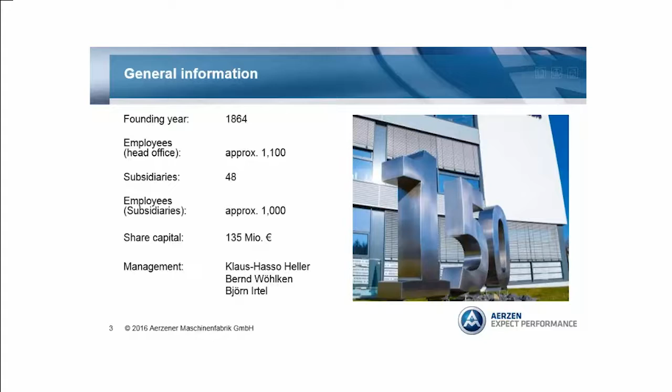Hello, my name is Artur Dybała, Aerzen Poland, subsidiary of Aerzen Maschinenfabrik. Aerzen Maschinenfabrik is a company coming from Germany, Lower Saxony, near Hanover, and manufacturer of blowers, compressors, and gas meters. Founding year 1864, so the company is over 150 years old. Share capital 135 millions, and management Klaus-Hasso Heller; it is a family-owned company.

In 2011, Aerzen bought a subsidiary manufacturer in Korea and created Aerzen Turbo. So we are also manufacturer of turbo with air bearing products, turbo blower, especially designed for low pressure, mainly water, wastewater, food industry, let's say clean industry. Subsidiaries all over the world, especially Europe, traditional market, but also Asia, America.

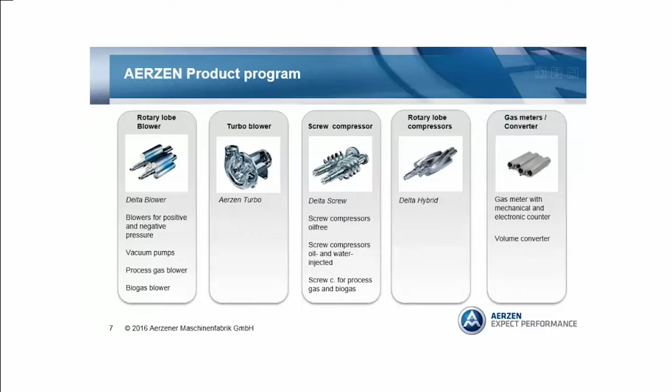This is our production portfolio again. Delta blower, positive, negative pressure, and Aerzen Turbo. Delta screws can be also screw compressors. These are screw compressors, mainly oil-free. Delta hybrid is a screw blower. There are also gas meters.

Thank you very much for keeping the time. Are there general questions about Aerzen or the products? So, no. So then we come to the next presentation. We have invited a company which provides diffuser systems mainly, Aquaconsult. They often work together with Aerzen, so please.

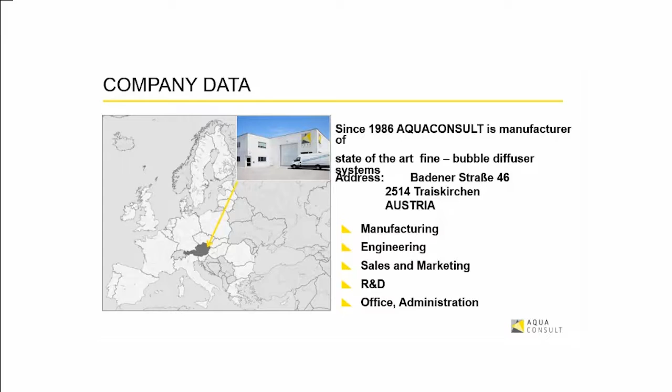So my name is Gerald Kleine. It's my pleasure to introduce you Aquaconsult. That's our company, located in Austria, a bit south of Vienna. And we have manufacturing, engineering, sales, R&D and administration all under one roof, like 20 kilometers south. But maybe we are more famous for the product, which is Aerostrip. That's our diffusers. And we have a 30 years history meanwhile.

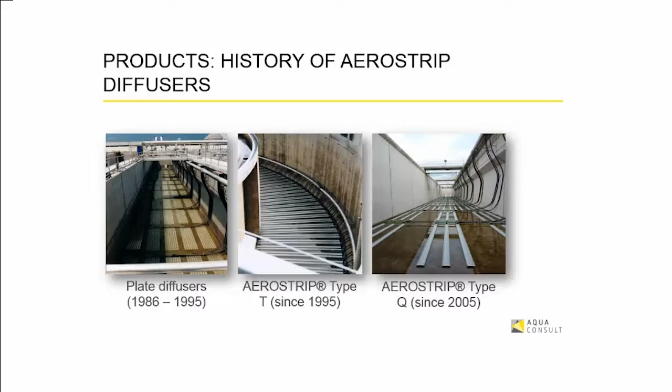We started with the big panel diffusers in the middle of the 80s, the 1 meter wide diffuser and then up to 4 meter long. And in the middle of the 90s, we started with the Aerostrip, a strip-shaped diffuser, 18 centimeter wide or 15 centimeter wide and up to 4 meters long. In the middle of the 2000s, another type with a plastic body came into our portfolio.

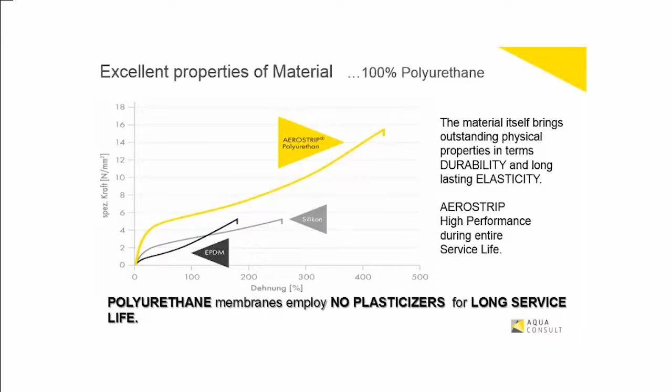So today we have two different types of diffusers, and they are known for longevity and efficiency. So why are they efficient and have a long service life? One thing is material. We use 100% polyurethane. This has no plasticizers, no fillers. So this has a very long service life. And important, it remains flexible and elastic for a very long time. So that's one of the tricks, let's say. And the other thing is innovative perforation technology.

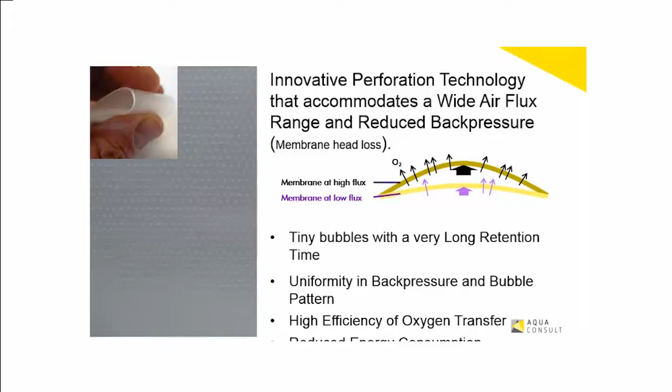So we can handle a very wide airflux range, a very wide operation range of diffusers. And during the last years, we also worked on reducing the head loss of the diffuser. As Dr. Wagner explained, it's all about physics. We have to keep the bubble as long as possible in the water, so that as much oxygen as possible is transferred. And how we do that is we make small bubbles, and we make a very uniform distribution. And at the end, we have a very high oxygen transfer.

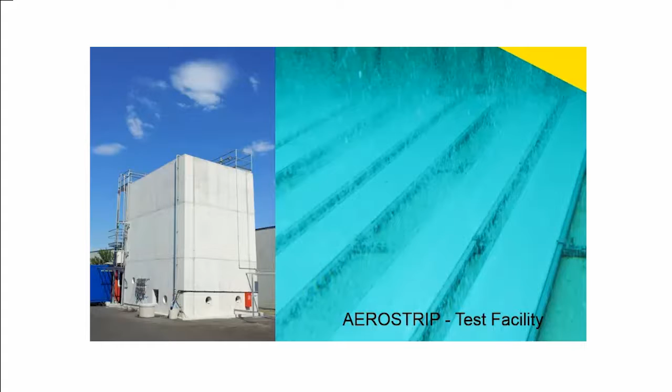We also have our own test facility at our yard. It's a 200 cubic meter test facility, and we are a bit, let's say, obsessed by quality. So each diffuser, before it leaves the factory, is tested for pressure drop. So for each diffuser, wherever in the world, we know what pressure drop this diffuser had when it left the company, and it is also checked in the water basin. So that's, I think, pretty outstanding.

And so I think we brought quality to high standards with Aerostrip, and I say thank you.

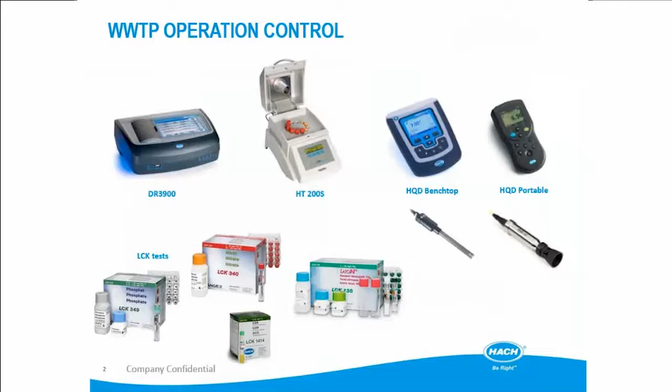So I think that some of you know our laboratory solutions, but for sure all of you know our process sensors. And we are one of the largest worldwide manufacturers of process measurements. And of course, if you have them installed on the plant, it will be nice to use them not only for monitoring, but also for process control.

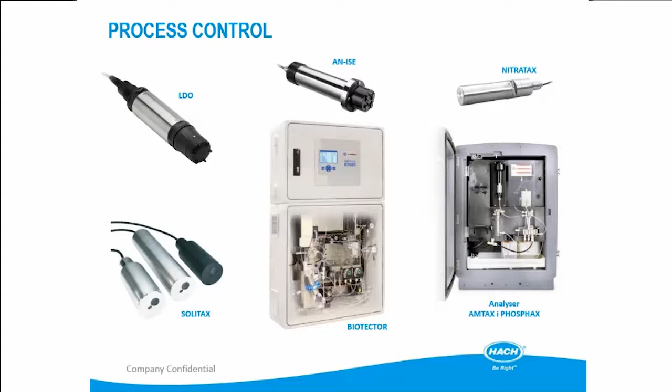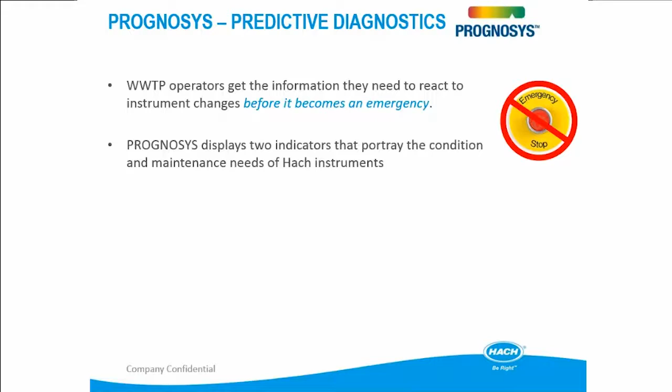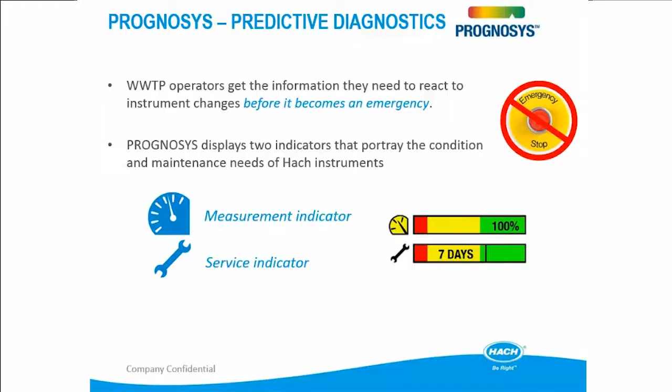We as Hach thought that maybe if you are relying on our instruments, it would be nice to give you a tool to be able to trust our instruments and work with them in a very easy and predictive way. That's why we developed a Prognosys system, which shows you very simple information. So it tells you how accurate the measurement is, but most important for the plant operators is the information about the maintenance tasks that you have to do with your instrument to keep it working all the time at high quality.

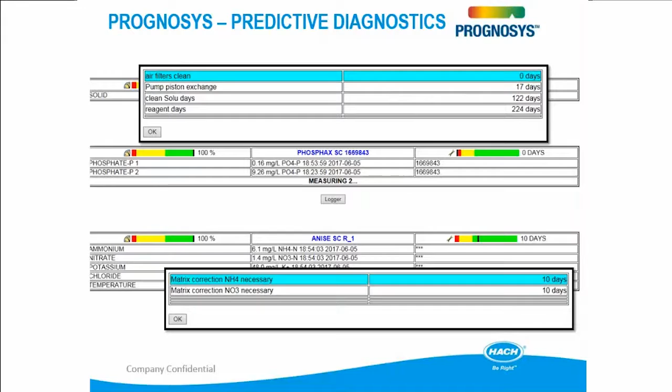It is visible on our controllers, and also if you connect to the controller using the internet connection, just by one click you can have a very detailed insight into the future maintenance actions that you have to take with the instruments, so that it's running continuously without any unnecessary unplanned stops and problems. When we have this, we can move on to process optimization, because this requires huge trust in the measurement, and we have to make sure that they are all reliable.

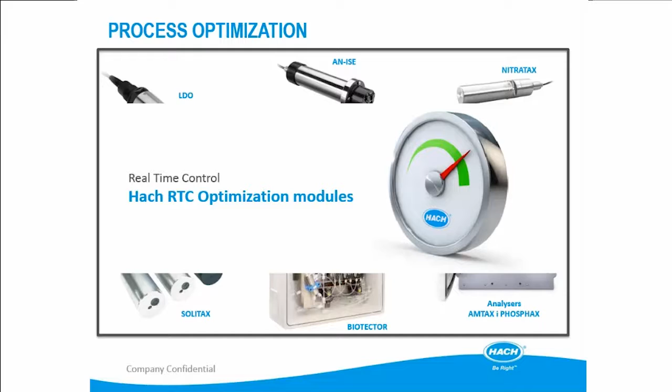And here Hach also developed an RTC system, RTC from real-time control, a modular, standardized optimization system which can be used to optimize several different processes at wastewater treatment plants. So the biggest savings, of course, you can achieve using aeration optimization, but also we can optimize coagulant consumption, polymer consumption, sludge production, and several other processes.

What is important? You don't have to know what you want to get from us. We, as our Hach team, come and analyze your plant, and we tell you which solution would be the best for you and which will give you the best effect. We are not the only supplier of such systems, but certainly the one with the biggest experience in the world. At the moment in Europe, we have over 1,500 RTC modules installed, so it is about 700 treatment plants. At some plants there is only one module, at some plants we have bigger systems.

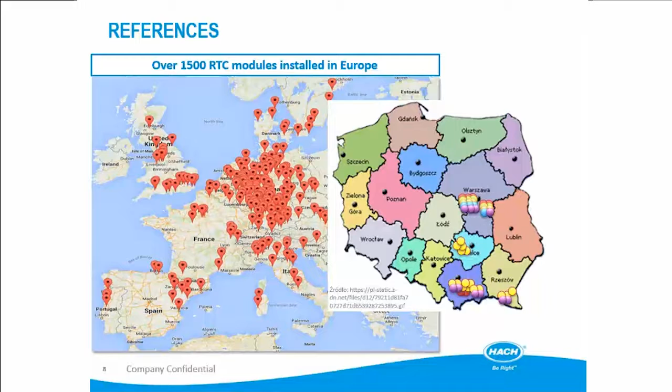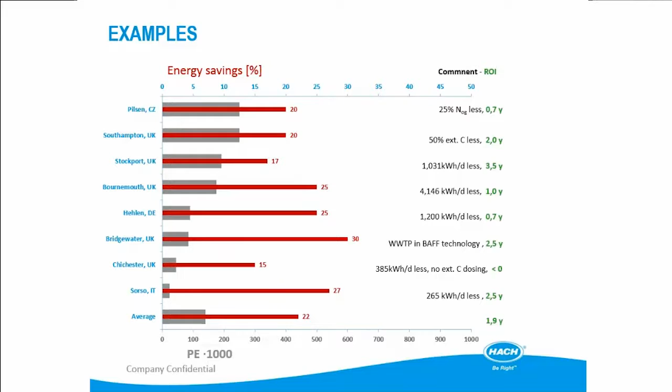And you are probably wondering why I am holding the phone in my hand. Not only to know that I'm running out of time, but also to show you that we have a new solution, a new concept, which is mobile sensor management. And such a smartphone can give you a lot of information about your plant, about your instruments, about maintenance instructions, and also a connection to the laboratory.

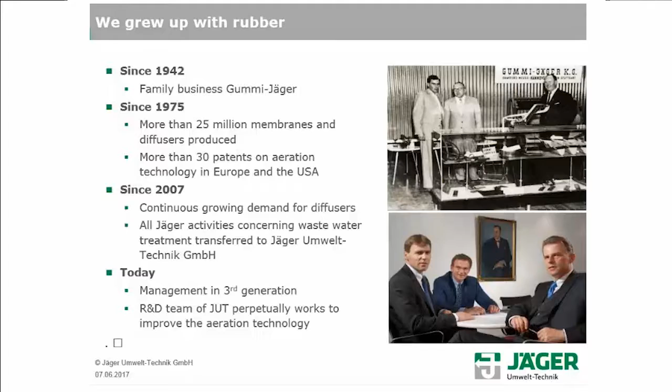In the year 2007, the company grew and was divided into 4 different divisions. One of the divisions is Jäger Umwelttechnik. Today, the company is managed by the 3rd generation. This is our product range. As you can see, we have more or less all types of diffusers, tube diffusers, disc diffusers, also strip diffusers, and coarse bubble diffusers.

A second part of our business is the IFAS. This is the integrated fixed film activated sludge system to improve plants and increase capacity of wastewater treatment plants up to 100%.

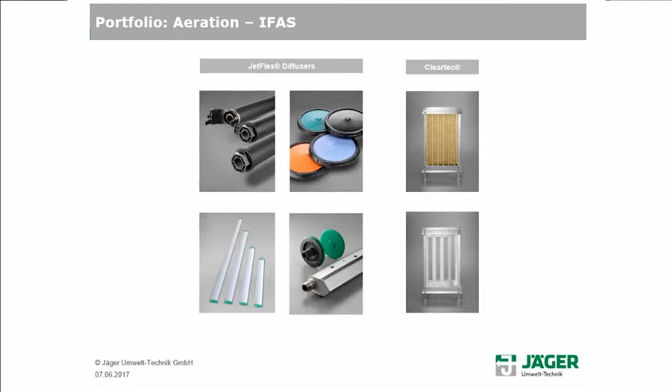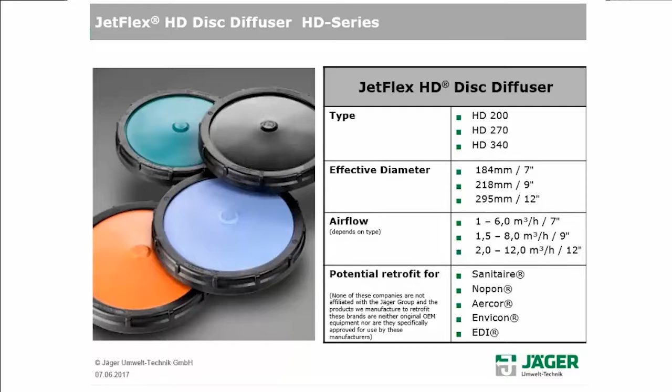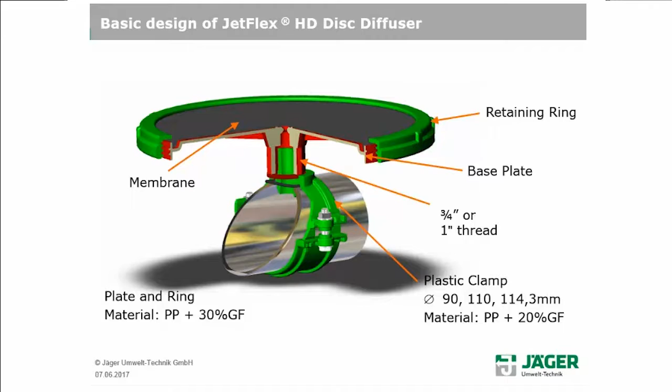Here you can see our disc diffusers. We have 3 sizes, the 7-inch, 9-inch, and 12-inch diffusers with more or less all available membrane materials, EPDM, low plasticizer EPDM, silicone, and also Viton for special applications. Next is the system. We can supply the complete aeration system, including the piping, installation and accessories. This is a typical installation of disc diffusers.

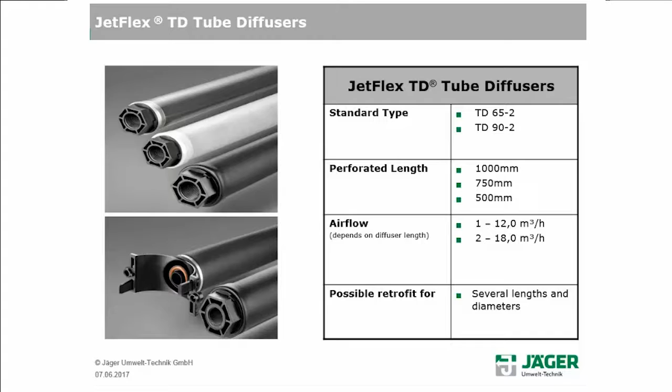Then our tube diffusers. We produce 2 diameters, 65 millimeter and 90 millimeter, 3 standard lengths, but also different sleeves for diffusers from other producers. We have a special design of tube diffusers. This is the 2-groove diffuser to improve the lifetime of the diffuser and also to reduce the pressure drop of the diffuser. It's special for our type of diffusers.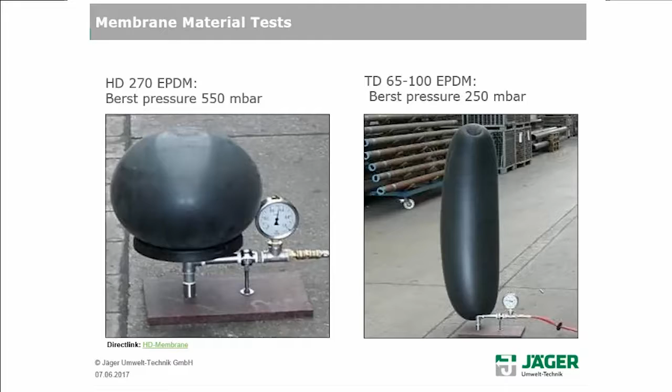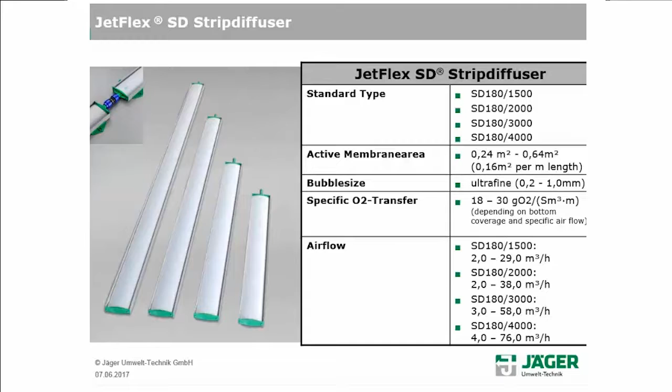And then here we have also the strip diffusers with different lengths and different airflow rates. Typical installation for strip diffusers, also available for liftable installation.

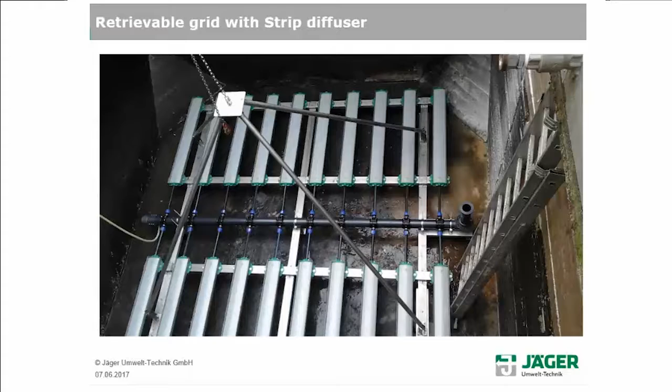Hello, ladies and gentlemen. My name is Lena Rosenthal and I work for Kleine Solutions, which is a German company that offers solutions that optimize your wastewater treatment plants. And I'm very pleased that I have the opportunity today to introduce to you two of our products. One is the TAS, which is a sludge water discharge system, and the other one, the Biocon, which is a biology control system.

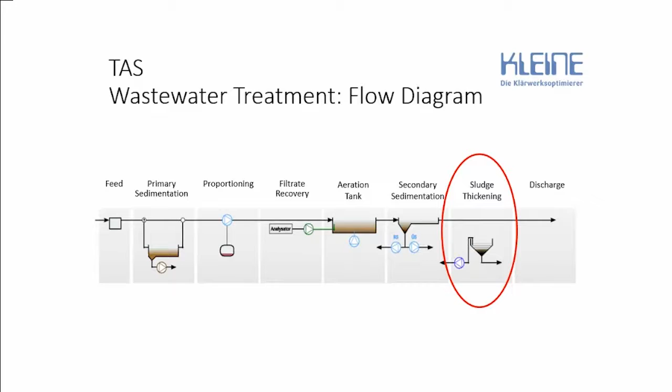First, I would like to start with TAS. As you can see here in the wastewater treatment flow diagram, TAS is applied towards the end in the sludge thickening process. Now I would quickly like to describe how TAS works. You can see on the right the picture of the setup of TAS. It consists of a suction pump, which is connected to a swivel arm and a gearbox, and of course it has a device to attach it to the sludge tank.

As you can see in the other pictures, in the sludge tank there are different zones formed out of water and out of sludge. The suction pump of the TAS moves up and down the sludge tank, and it has an ultrasonic sensor that detects the water zone. When it detects the water zone, it stops and pumps all the water of the zone out of the sludge tank. After it has eliminated all the water in the water zone, it continues moving up and down until all the water is eliminated from the tank.

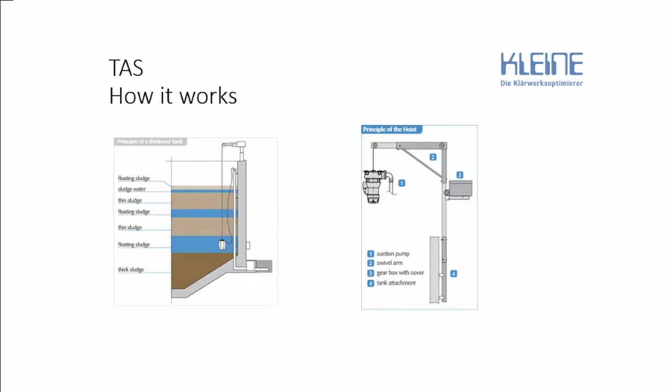Now quickly, why should you choose TAS? TAS of course improves the degree of thickness of your sludge, and it saves costs in further sludge processing, in sludge transport, and in sludge disposal. And especially it also saves energy costs. Also, it increases the storage capacity of your sludge tank, and the process of TAS does not need any chemicals. Furthermore, TAS involves little cleaning and is nearly maintenance-free. And last but not least, all parts of TAS are made in Germany.

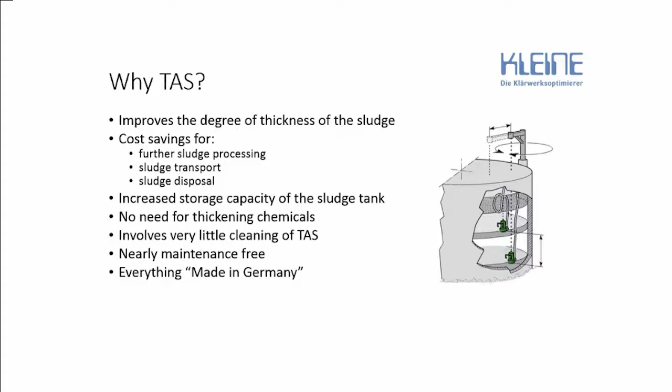Now I would like to introduce the second product, the Biocon, the biology control system. As you can see here in the wastewater treatment flow diagram, you can use Biocon for proportioning the aeration tank and the secondary sedimentation. And furthermore, Biocon can be applied to improve your discharge values.

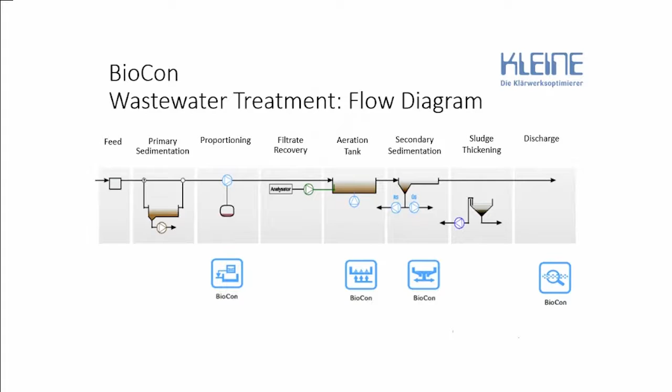Now I would like to describe how Biocon does this. You can see here that it consists of 4 modules. One controls the aeration, and with this it controls the denitrification and nitrification process depending on your demand and also on the degree of pollution that is in your wastewater at the exact moment.

Furthermore, it also controls the sludge flow, the flow of recirculating and surplus sludge, but also it controls sludge dewatering and sludge thickening. And another module Biocon has is the phosphor module, which controls the phosphor elimination, biological and chemical. Also depending on your demand and degree of pollution. And with this module, you can of course save chemicals.

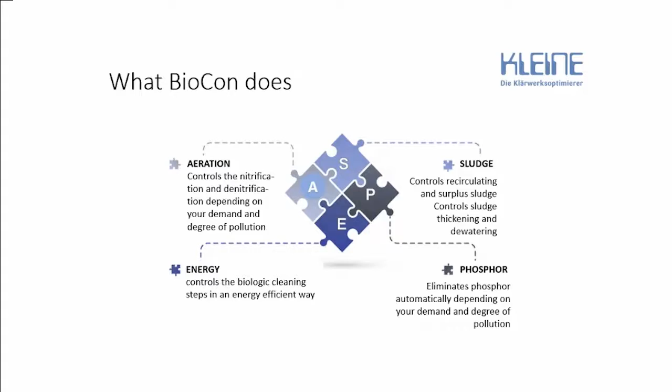Then we have another module, the energy module, because with Biocon, you can control your whole wastewater treatment process in an energy efficient way. So to cut a long story short, if you want to take ecological aspects, especially energy efficiency, and economical aspects, especially saving costs for energy, and combine it with continuous operational safety, Biocon is definitely the right choice for you.

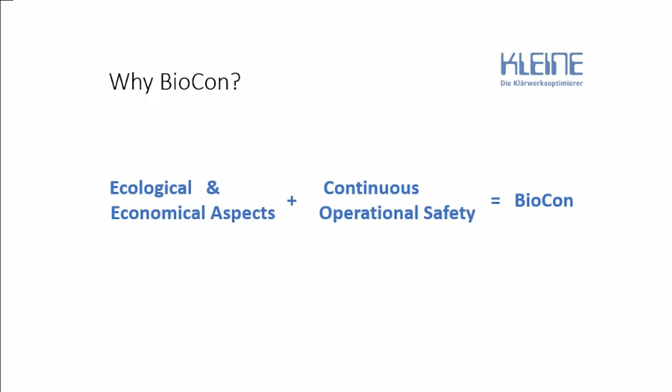Now we're changing to another part of engine we need, the pumps. We have invited KSB, but let me give you a short story about pumps. Last week I had holidays and I had a chance to visit a waterwork. A waterwork consists of a lot of pumps. And usually the pump system is the pump itself and the engine. And if you go to a waterwork or also to a wastewater treatment plant, there's usually a sign, there's a number, pump 1, 3, 5, 6, 7 or whatever.

But this waterwork had a different naming of the pumps. It's always an old man from the waterwork who has died perhaps. In this case, Arthur. Arthur is the pump. And he was always driven, all his life he was driven by the engine. And that's Franziska, that was his wife. So that's a kind of naming. So please, KSB.

Hello everybody, my name is Rafał Wojko and I've been working for KSB for over 13 years. Now I will show you some facts and a small company presentation. So, KSB is the leading company, manufacturer of pumps, mixers, and also all systems we need to clean, to transport such media as sludge, rainwater, wastewater.

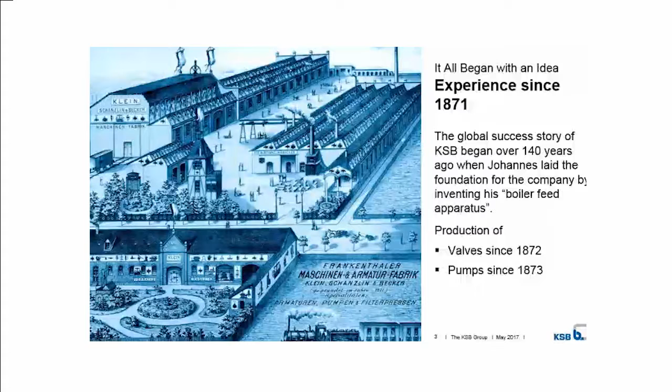The company was established in 1871. The name is from 3 letters of its founders. K stands for Mr. Klein, S for Mr. Schanzlin, and B for Mr. Becker. So KSB is Klein, Schanzlin, Becker. Now some numbers about financials for the last year. The first numbers are global and the second are for Poland. Last year, as we know, was a little bit lower than former years.

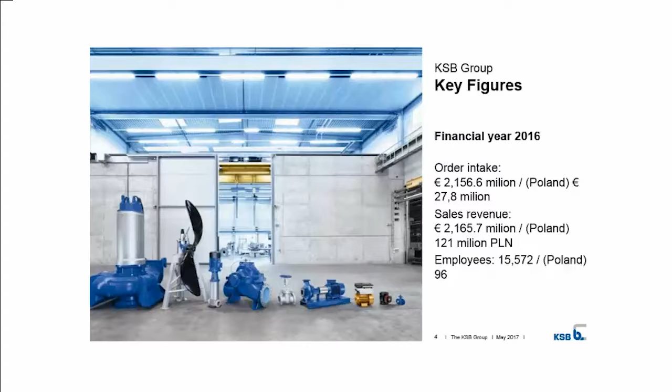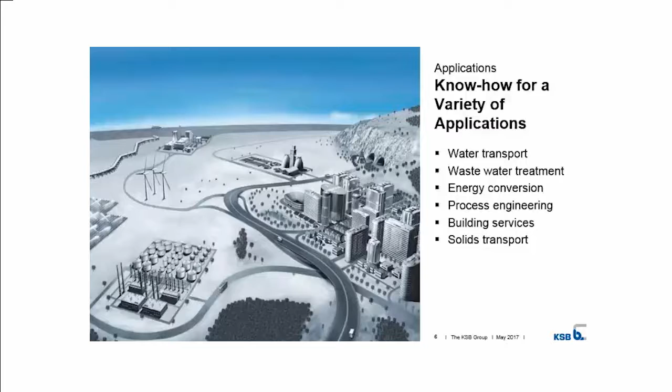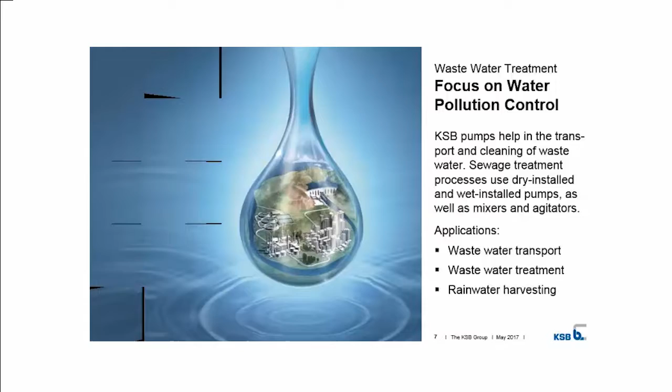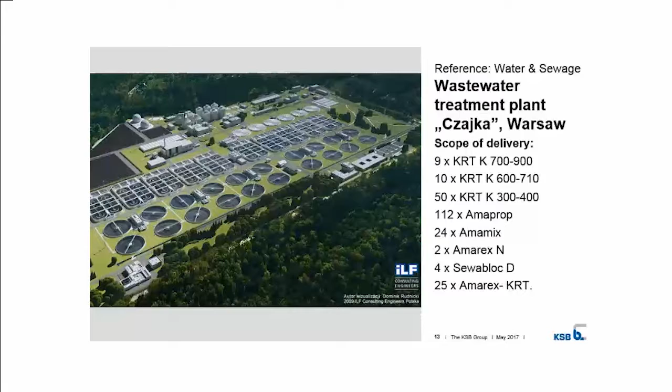Here are some references, the biggest but not, of course, all. The wastewater treatment plant in Kraków, Płaszów 2, we delivered pumps and mixers, big tube installed pumps, Amacans, lots of machines. One of the biggest, if not the biggest, wastewater treatment plant in Warsaw. We also delivered big pumps with mixers, over 130 units. And here is the reference about the pumping station with dry installed pumps, one of the biggest, of course, that we delivered for the Warsaw Waterworks.

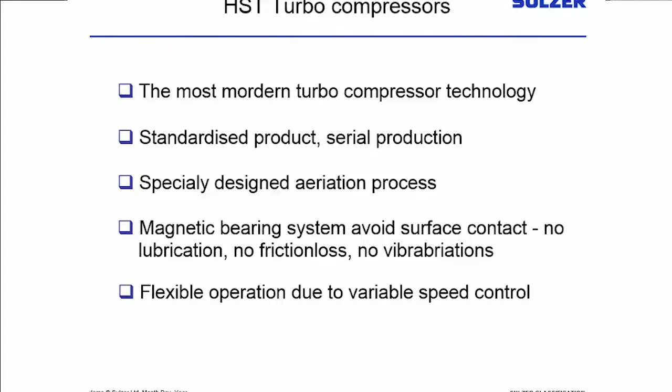What is our target? Low energy consumption, no maintenance. This is not possible, but normally we make a service agreement in Denmark around 5,000 Danish crowns per year, which is less than 1,000 euros, 800 euros, something like that. We have built in a control monitoring system. You can get all the information from the compressor to your SCADA system.

We have no oil inside the machine. You can do nearly everything. I normally say in Denmark, you can only spoil our machine if you take a forklift and drive it into our machine. But I can say you must not put acid back in the machine. Yeah, I have a customer that tried that.

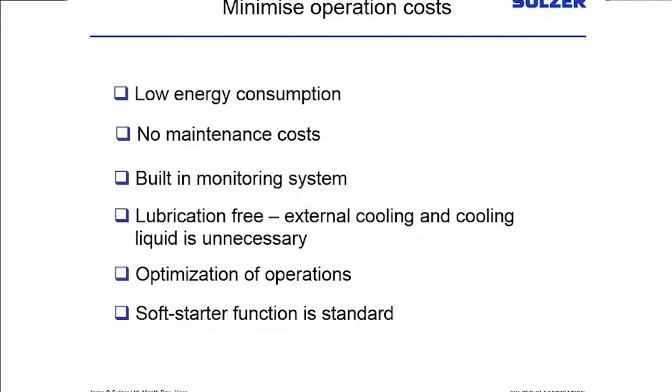In fact, our machine is quite easy. We just have this rotor, we have the stator, we have the impeller. This is nearly what we have. And then we have a lot of technical issues around it, because with this magnetic bearing where this rotor is flying, we have a lot of speed in our impeller, running between 10,000, 12,000 up to 42,000, if I remember correctly, RPM.

What we can deliver is air to the system with low energy consumption, and this is the most interesting part. What we also can deliver is a total solution where you can get a compressor room, the whole installation. You can get this one. It's one of the first machines I sold in Denmark, from Marselisborg treatment plant.

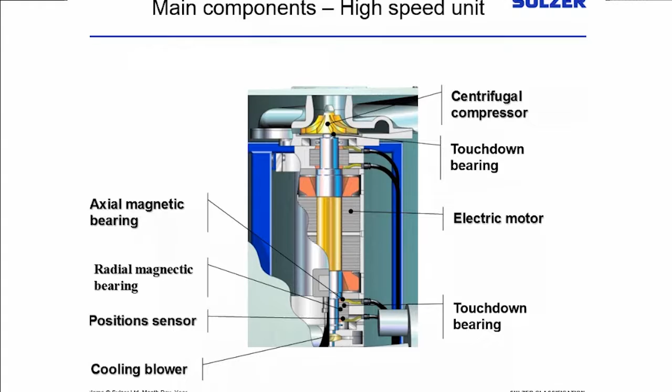This is one of the reasons Marselisborg is a treatment plant that produces electricity. It's now producing electricity for the city of Aarhus. When they installed this machine, they saved 1,000 kilowatts each day. This is worth remembering.

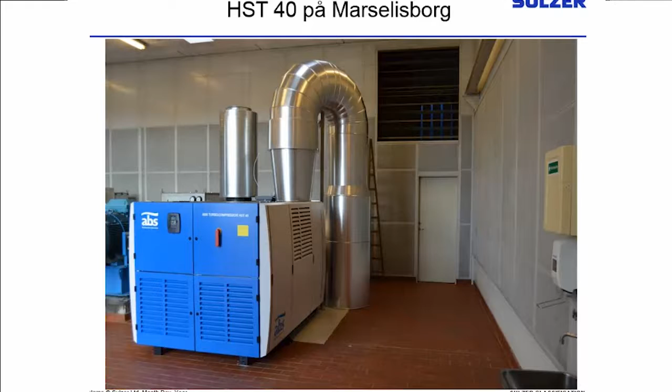At Hillerød we saved with the first machine 38%. The kilowatt figure is interesting because they wanted three similarly sized machines, but got two different size machines and saved less than 30%. Today they are building a new treatment plant. Aalborg is a funny case too, because they take the air from the room, but the room is very cold, saving, if I remember correctly, 32%.